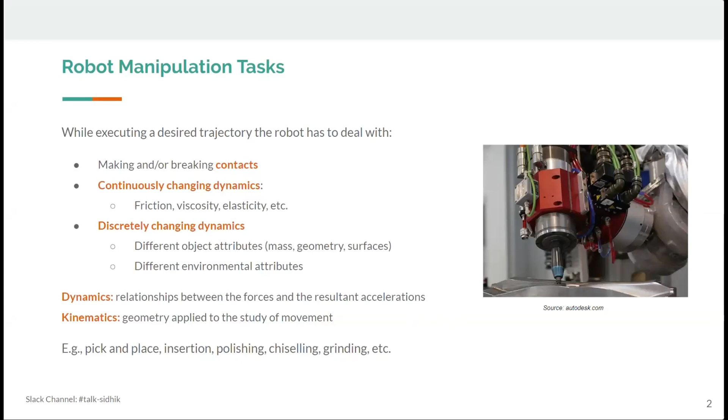These changes in dynamics could be continuous, which can be due to the friction, viscosity or elasticity during the interaction, or it can be discretely changing, which can be because the robot makes or breaks a contact with the environment, or it can be due to sudden and discontinuous changes in environmental attributes.

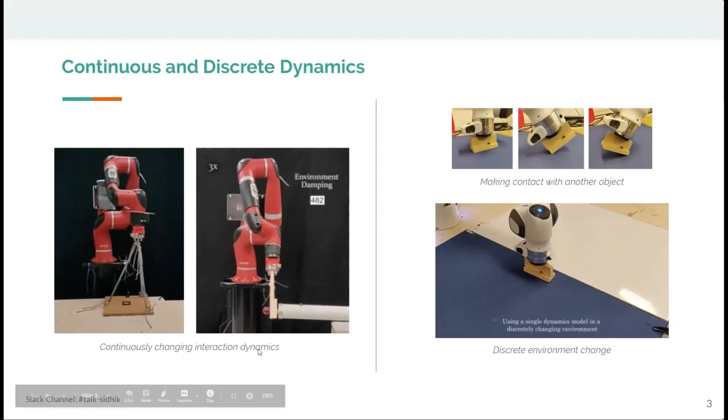In the second, the robot is also in continuous contact, but the environment damping is continuously increased, which causes the robot to experience different forces as it executes this task.

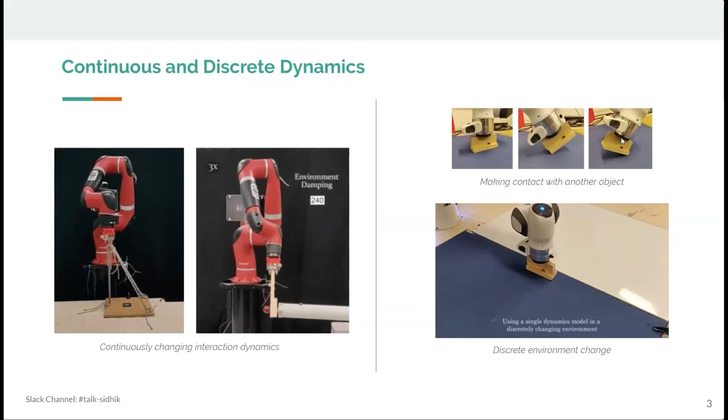On the right hand side, we show examples of discrete changes in dynamics. This can be because the robot makes contact with a new surface as on the top, and depending on the type of contact that it makes, for example surface contact or edge contact, the interaction dynamics is different.

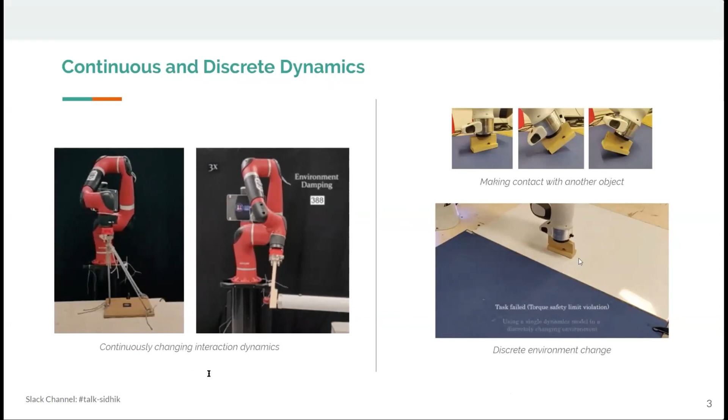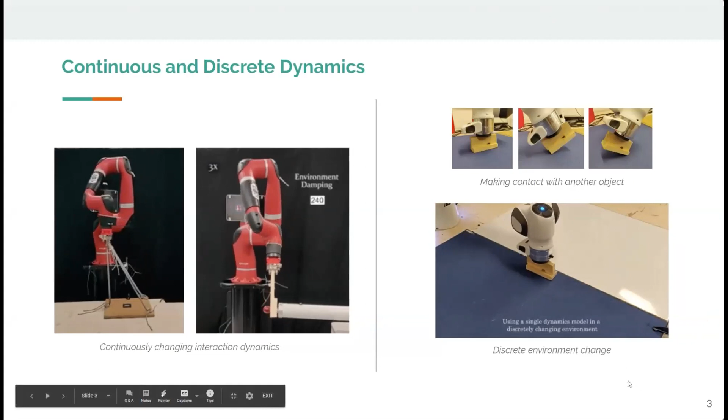At the bottom, the dynamics is discretely changing because the robot moves from a surface of a higher friction to one of a lower friction. Here, the environment is discretely changing, which causes the robot to experience a different frictional force. It can be seen that the robot, as it performs the task, overshoots when it moves to a surface of smoother friction.

In general, changing contact manipulation tasks can be seen as a piecewise continuous system where the dynamics is continuous within a contact mode, but it is discontinuous at the transition point.

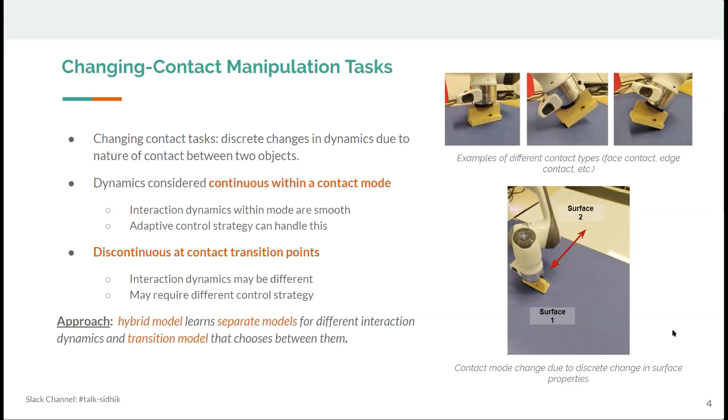At the transition point, the robot may not be able to use the same model that it has for the previous mode. Therefore, one way to approach such a piecewise continuous system is by learning a hybrid model that learns separate models for these discrete modes and has a higher level transition model that is able to identify which mode the robot is in.

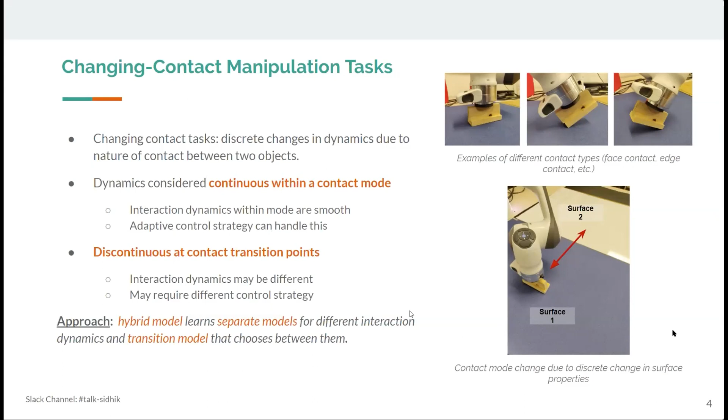Before introducing the hybrid framework that we have, the performance task being considered here is: we assume that the robot has the desired motion trajectory from a planner, and the robot should be able to produce the control signal which will enable it to execute the task while dealing with the changing dynamics during the task execution.

In a baseline case with no learning, the robot will have constant P and D gains for the PD controller, which, as shown previously, will not enable the robot to complete the task successfully.

The robot experiences the world and the environment using the end effector force torque sensor, as well as using the current end effector position and velocity.

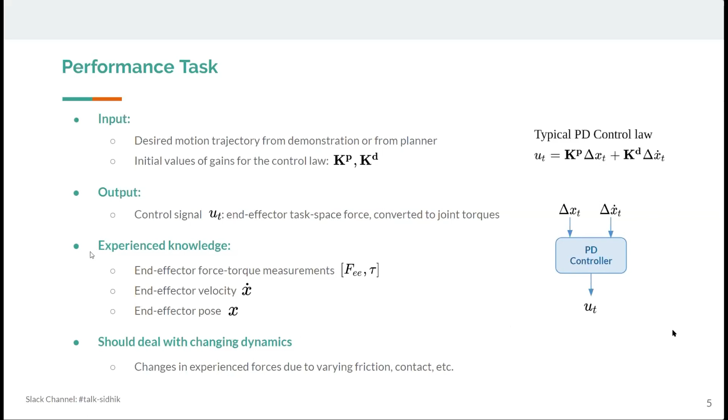We propose a hybrid learning framework which has a higher level transition model that tries to identify the current mode that the robot is in, and each of these modes is associated with a dynamics model, an adaptive control law, and a relevance condition which determines when the mode is relevant and should be applied.

The dynamics model and the adaptive control law are incrementally and continuously adapted, and because of this, it provides an online learning framework which enables the robot to learn new modes, identify new modes, and learn the dynamics model for that mode as the task is executed.

For learning the dynamics of a mode when the robot is within a contact mode, we use the incremental variant of GMM. GMM is used to predict the end effector forces and torques given the previous measurements of the end effector forces, torques, and the velocity. The forward model then is able to predict the end effector forces and torques that can be expected during the task execution in that mode.

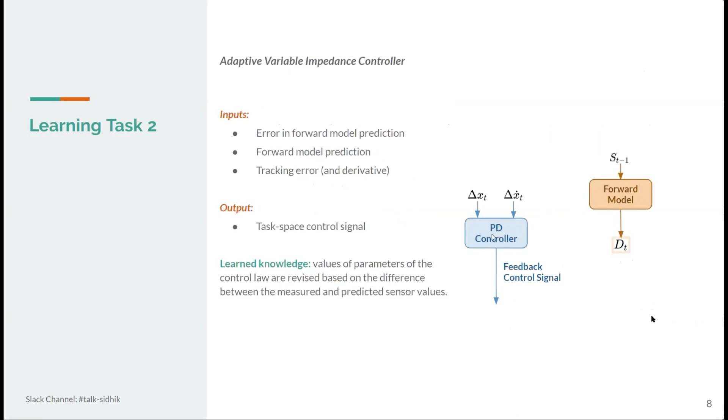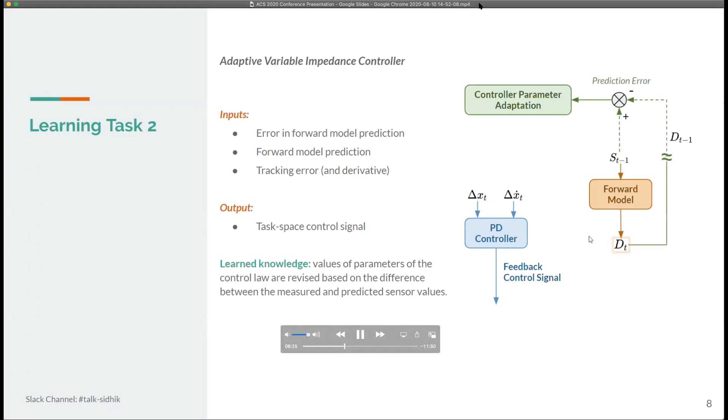We also have a PD controller here as described previously, but instead of having constant P and D gains, we vary the controller gains using the error in prediction of the forward model, both to adapt the PD controller gains and to provide a weighting term for the predictions given by the forward model. The idea is that if the forward model is accurate, we weight the feed-forward term higher. However, if the predictions are not accurate, we use a higher PD gain and follow the provided trajectory more closely. This way, the robot can use the forward model and complete the task with lower impedance gains when the forward model is accurate.

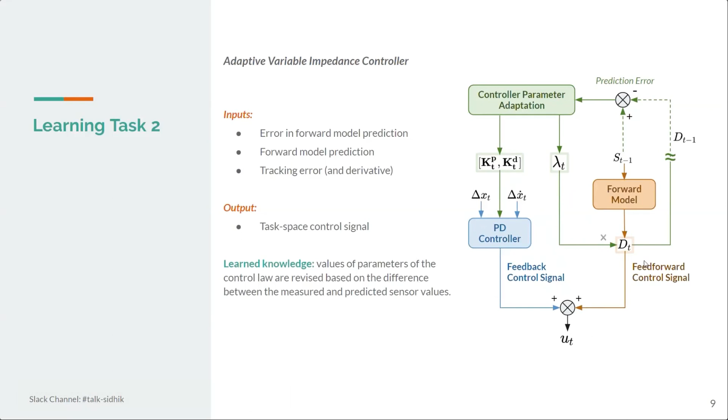This is the controller formulated in mathematical terms. The first part is the PD controller, where the P and D gains are continuously changed depending on the predictions given by the forward model in that mode. The second part is the force control part, used to apply a desired force in a direction orthogonal to the direction of motion. The final part is the feed-forward term provided by the forward model.

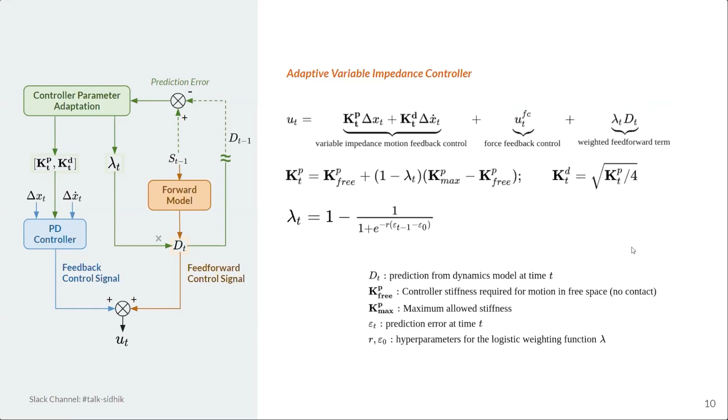The transition model is a higher level model that tries to identify which mode the robot is currently in. To do this, we represent each mode using a meta representation that is then used for incrementally clustering into different clusters using an algorithm called BIRCH.

We use a feature representation for this clustering that makes it robust to motion direction and applied normal force. The features are chosen such that the framework can distinguish between these modes, and because of this, it is dependent on the type of task you want to do.

Similarly, for identifying the different type of contact that the robot makes with the surface, we also incorporate the ratio between the torque and the applied normal force. Because of this representation, the framework is able to identify between the modes while being robust to the direction of motion and the applied normal force.

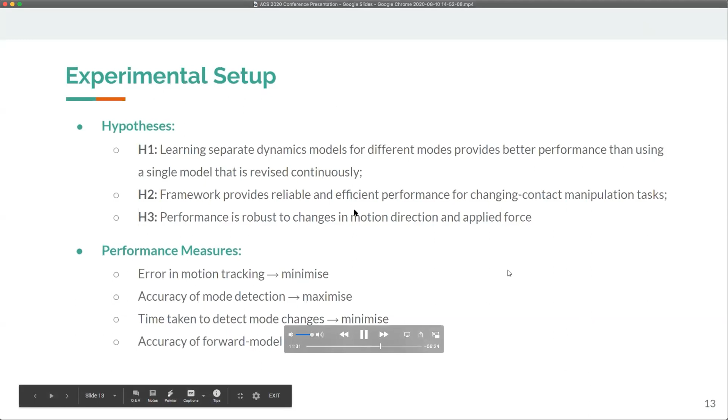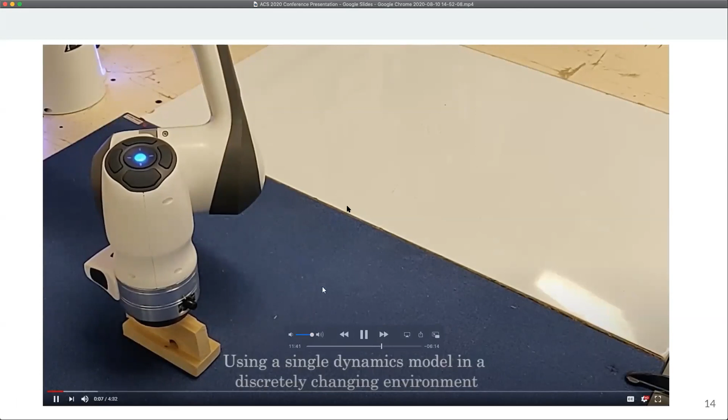In this video, we show an example of the framework in action. In the first video, the robot is provided with the model for the first surface, but not for the second surface. Because of this, the robot overshoots and is not able to complete the task successfully.

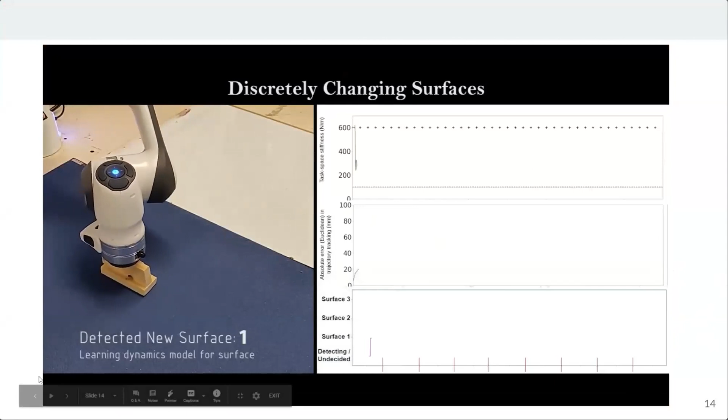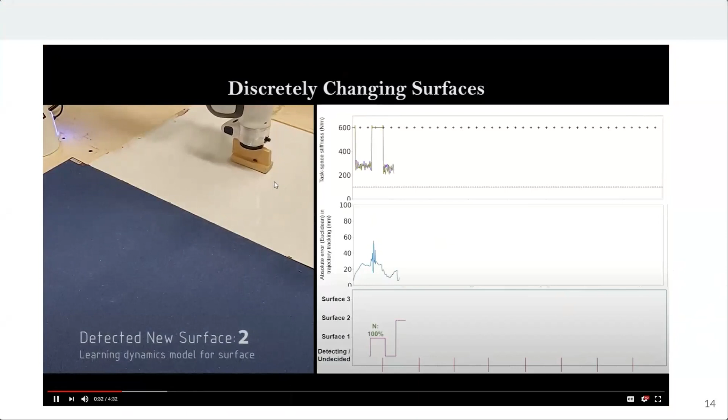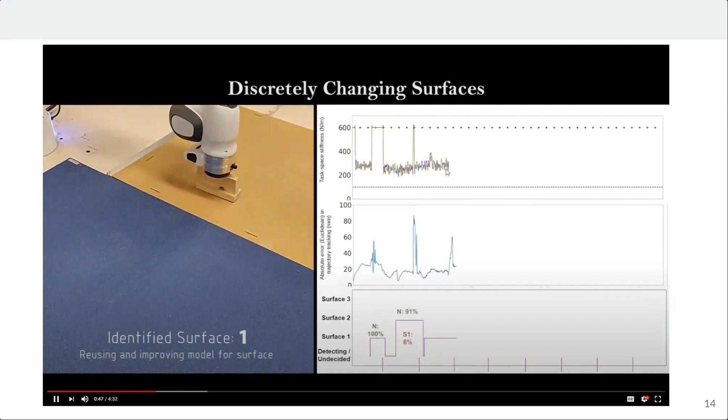Here, the robot is learning from scratch. It is able to identify that a mode change is detected, and it goes to high stiffness and classifies it as a new mode and learns a dynamics model for that mode. When a mode change is detected, the robot briefly goes to a high stiffness state, and then once the mode is identified, it switches back to a lower variable impedance control.

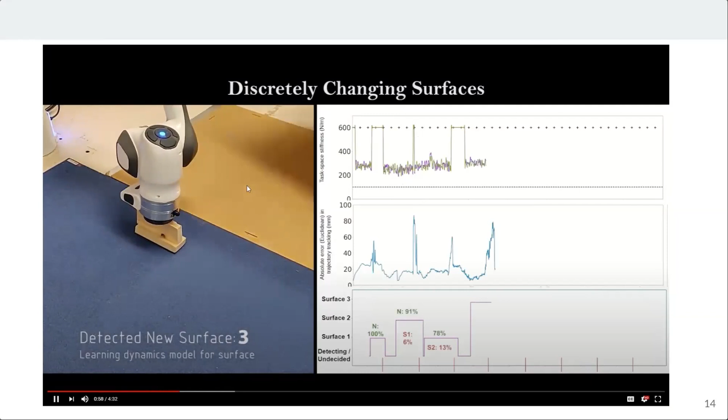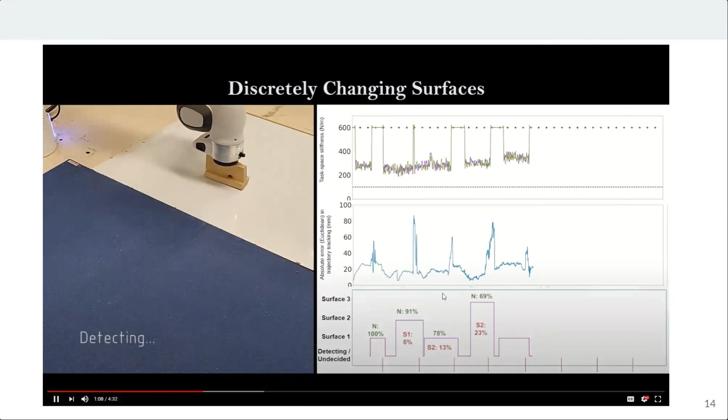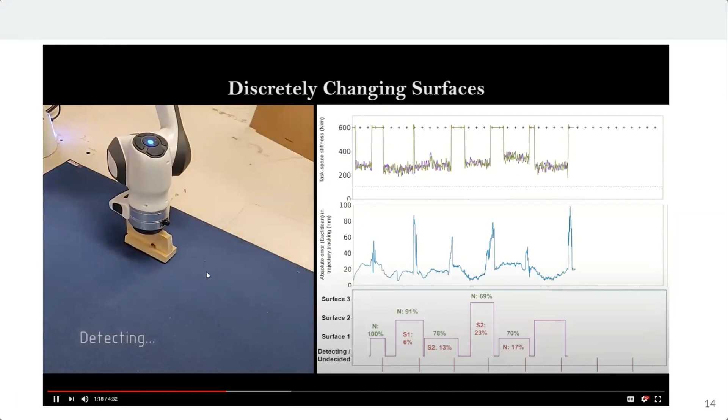Here the robot sees a new surface, surface 3, and learns a dynamic model for that mode. But when it sees a previously identified surface, it uses the dynamics model that it has already built and improves upon. In the second plot, it can be seen that the trajectory tracking error spikes when there is a mode switch, but then goes back down when it identifies the mode and applies the variable impedance control.

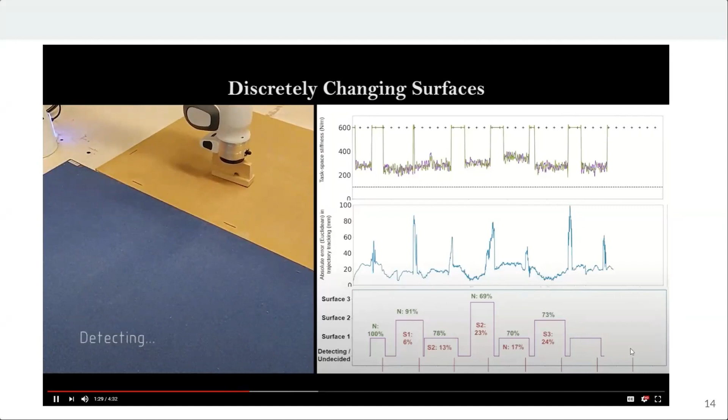At the bottom, it can be seen that the robot is able to identify the current mode accurately with the highest confidence in all cases.

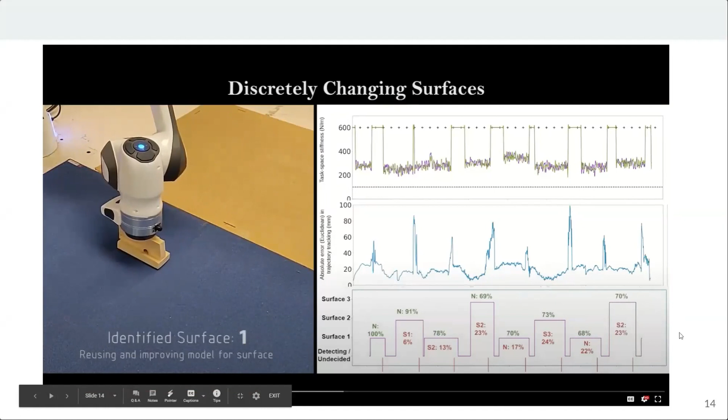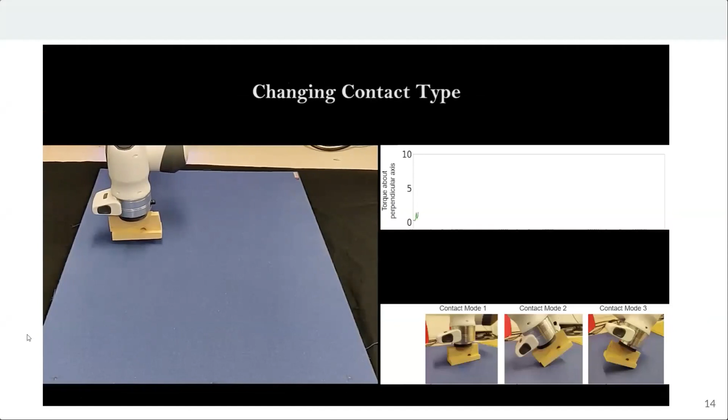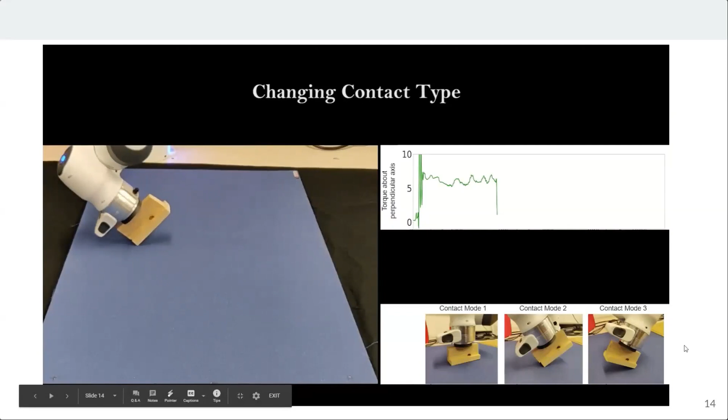In this task, the robot performs the sliding motion while making different types of contact with the surface. It is learning the dynamics for each of these modes separately online.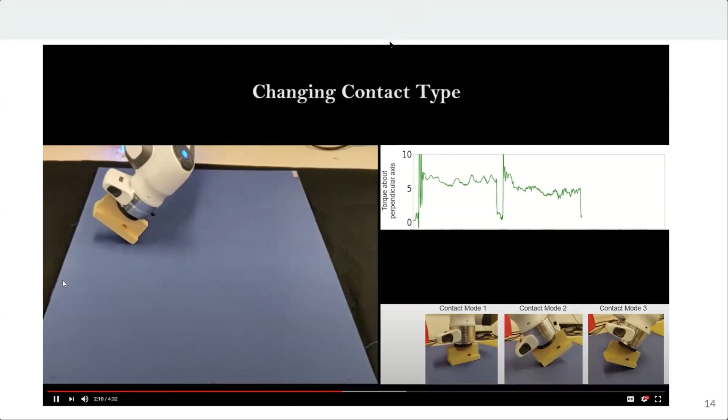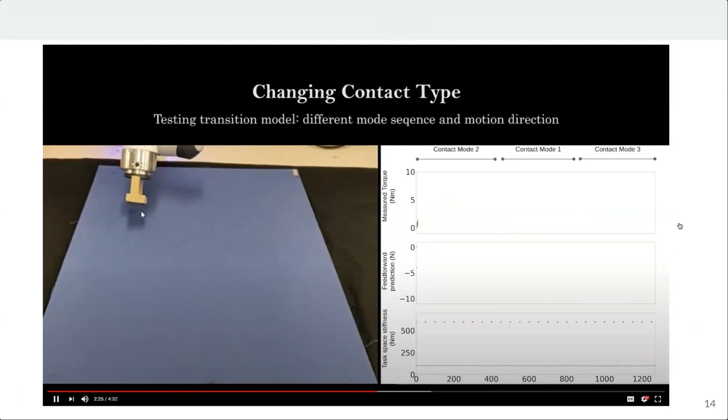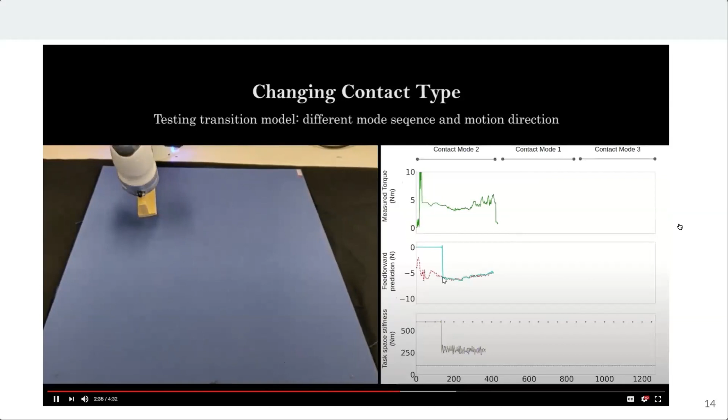The learning is then tested for the robot performing the same task but in a different sequence and direction. It can be seen that the robot is still able to identify the modes correctly. It can also be seen that the feed-forward prediction is zero when the robot is trying to identify the mode.

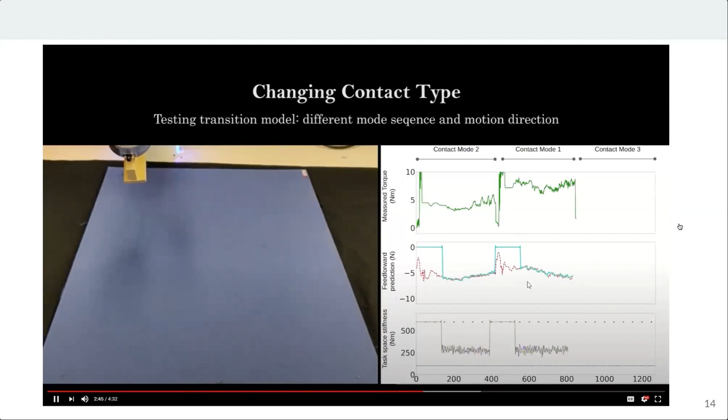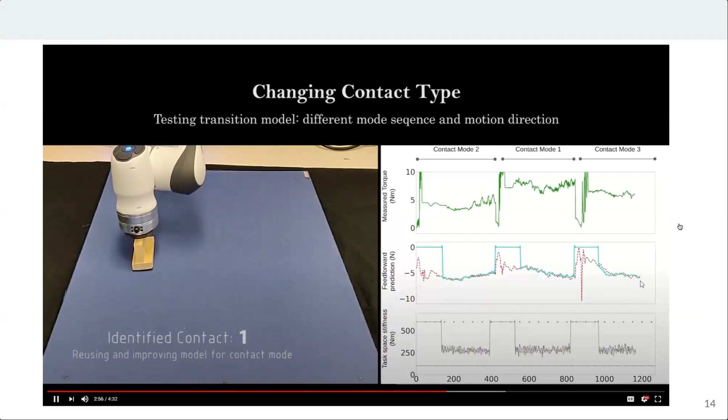It then uses the feed-forward model for predicting the forces once it has identified the mode. It can also be seen that the prediction is very close to the actual measurement from the sensor.

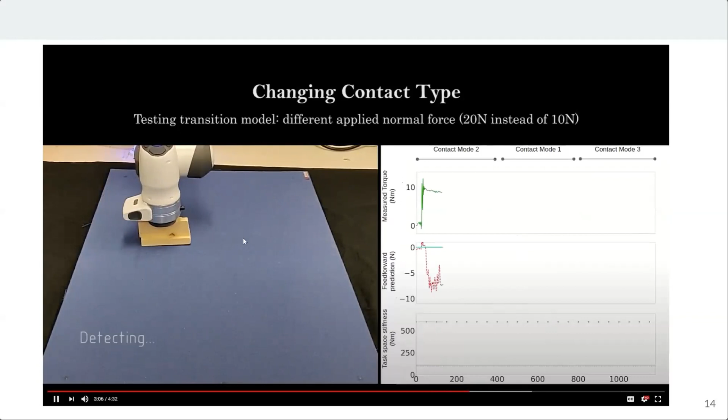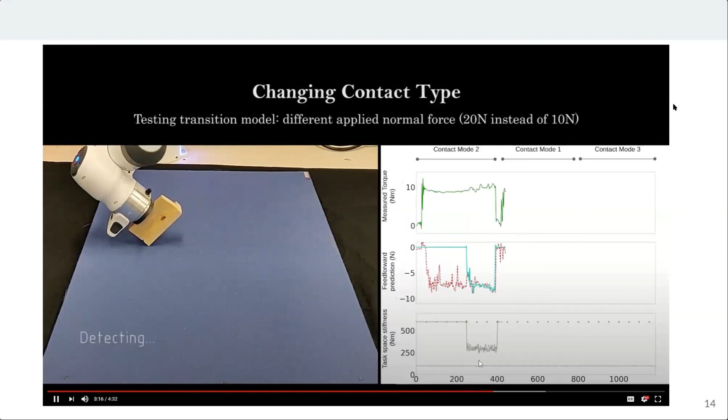Here, the robot is performing the same task, but while applying a higher force than the one it learned the mode for, applying twice as much force as it applied previously. It can be seen that it's still able to identify the modes.

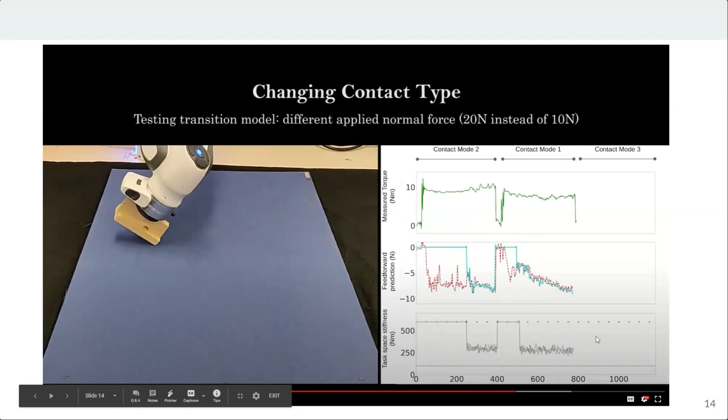At the bottom, it can also be seen that the robot briefly uses a high stiffness control strategy while trying to detect the mode, and once it has detected it, it switches to the variable impedance mode control.

The advantages of this hybrid learning framework are that you do not need to explicitly model the environment dynamics. It can also learn new modes when it observes a previously unseen mode. The learning is completely online and happens continuously, enabling it to handle smooth as well as discontinuous changes in dynamics. The framework does not learn a sequence of modes, and because of that, it is able to identify the mode.

It is able to identify the mode regardless of the order in which they appear. The state representation we use also makes it invariant to the direction of motion as well as the applied normal force.

In conclusion, we presented a hybrid framework which learns the piecewise continuous dynamics characteristic of changing contact manipulation tasks. We have a higher level transition model that identifies the mode the robot is currently in.

It is also able to label a new mode if it has not seen it previously. Then we have a lower level dynamics model for each mode, which is also continuously and incrementally adaptive, and is able to predict the end effector forces and torques within that mode.